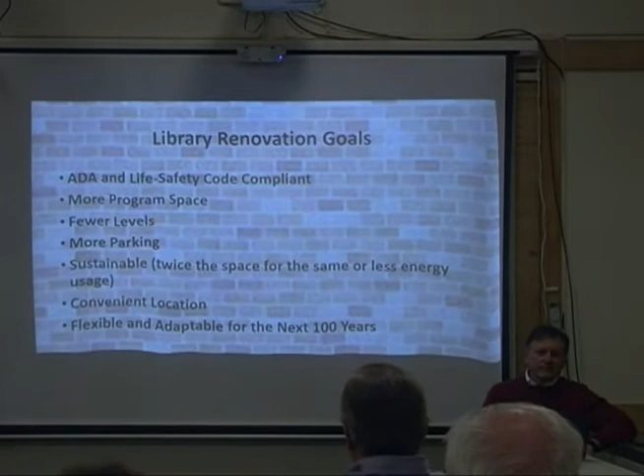So the library has been working on the library renovation project for several years, and when we first started we had a master plan committee, and the master plan committee worked on getting feedback from the community. We did surveys, which I'm sure a lot of you have filled out. We held 10 or 11 public meetings at this point to get feedback from the community. We consulted and questioned the library staff, each person individually, to get their feedback on what they felt the library needed.

We also went and visited a lot of libraries in the area, Alton, Plymouth, Bristol, Gilford, just to name a few, to find out what they have done, what they felt worked, and what they felt wasn't working for them. We then hired Tom Ladd from the New Hampshire State Library, who is now retired. He'd been there for 30-some-odd years, and he's a consultant, and he helped us design our building program and put all of our goals into writing.

ADA life safety compliant, of course, was one of our main issues. We're looking to add elevators, ramps. We want to lower our stacks so that people that come in wheelchairs can access all of the collection. And we're also looking to add a front and rear ADA entrance.

We also wanted to do as few levels as possible. Originally, we had talked about doing a one-story design, but in order to stay at our current location, we can't do it in one story, so we wanted to do as few levels as possible to make it easier to staff, friendlier to those with mobility issues, and parents with young children.

We also wanted to increase space, but also to add space that the community could enjoy. Our children's room, we wanted to move down to the first floor, make it a warm and inviting place. We visit a lot of children's rooms, and they're the heart of every library. They're very exciting, and we wanted to be able to see them, but not hear them, so we wanted a glass in, and you can see an example of that there.

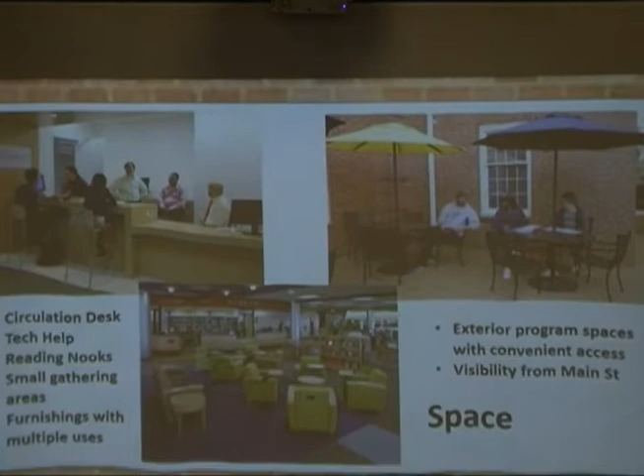And the staff and our patrons really wanted an exterior space. We live in the Lakes region. Part of the year it's quite beautiful. So we wanted a design that people could sit outside, read a book, check the internet. And we also wanted to have visibility with Main Street.

Our number one complaint from patrons is the lack of parking. So we wanted a way to get more parking, either through the municipal or library parking.

And sustainable—that was a comment from our patrons and also the trustees and staff, who wanted a more energy efficient building. So more windows, more natural light with passive solar, more high efficiency HVAC, and we have to redo all of our lighting fixtures, put LED fixtures in.

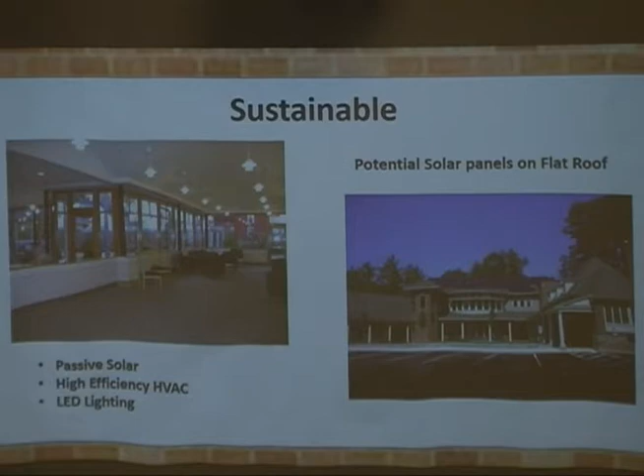Big feedback from our community was that they wanted us to stay on Main Street. We heard you. It's very important that we have a convenient location to help bring people into town, to support our merchants, but also people who grew up in Meredith have a fond memory of their library, and it was very important to them to keep that memory. So we're staying on Main Street.

Some of you may remember I started working in libraries over 25 years ago, and we had no idea computers were going to be as important as they are. Card catalog, magazine rack, all the paperwork involved in running a library took a lot of time, and libraries have evolved quite a bit since then. So when the library expanded in 1988, they couldn't imagine what was coming in 30 years.

Now we use computers, you can download books. Most of our catalog, actually a lot of our catalog, is online now—there's no more card catalog. So looking ahead 30 years from now, or 100 years from now, we needed to make sure we had a space flexible enough to adapt to the changing times. That was another consideration in our design.

And now I'll turn it over to Betty Stringer.

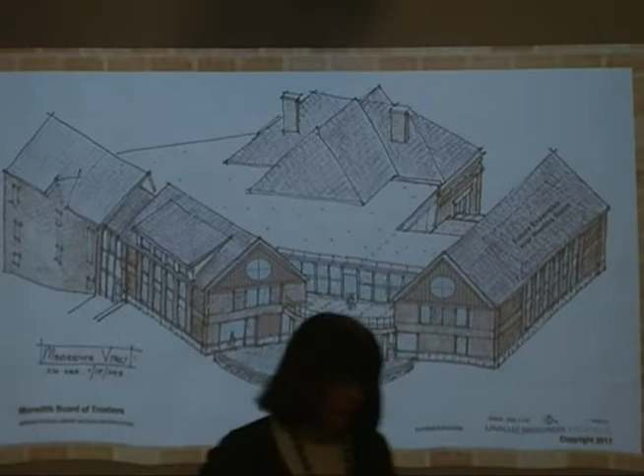Thank you, Erin. The trustees are really excited about this design that Ron's going to present tonight. I'd briefly like to explain the library trustees' process in making the choice of this particular design. You're looking at the back side of it now, and this should clear up some confusion that exists over our decision.

Last year at the town meeting, 88% of the voters agreed to expend funds for a committee to determine if it was feasible for the library to remain at its current location. Following many hours of work over the past six months, the committee negotiated a contingent agreement to acquire the Price property adjacent to the library, which could be used for additional library and municipal parking. Everyone—all the trustees, the public, everyone—agreed that was critical to making this plan successful.

They also interviewed three architectural firms, and based on some preliminary plans, they selected a firm to further develop its design. They met with the library staff, and produced a detailed design with a projected cost, and presented it to the committee. The advisory committee presented it on October 30th to the public, to the trustees, to the select board.

This committee, it was understood when established, would be advisory in nature, and the town manager confirmed that, stating the decision of what to do with the library would ultimately rest with the trustees, even though it's a town building. That was the intent in separating the library from under the town—it has its own control, a board of trustees.

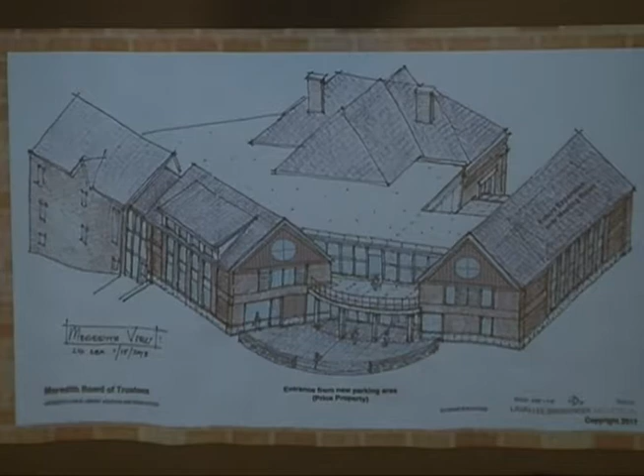So the trustees took the committee plan and subjected it to further review. This led to some concerns about the design, about some problems with where they would have to remove ledge, and phasing, and some uncertain costs that we were unsure about.

So knowing that the final design architect could differ from the committee architect, we met with three architects previously involved in the project and asked them, what can you do to give us more of what we want? And they all gave us great designs. It was Samyn-D'Elia, the committee architect; Chris Williams, who had done the '88 addition; and Lavallee Brensinger, who we'd worked with previously and had great trust in.

So all these great designs came to the trustees, and we dove into them. We wrote about their pros and cons.

I'm going to explain why we decided this design was best. The key decision points were the design and program space, the risk mitigation, maintaining operational abilities, flexibility and expandability, costs, and the architect expertise.

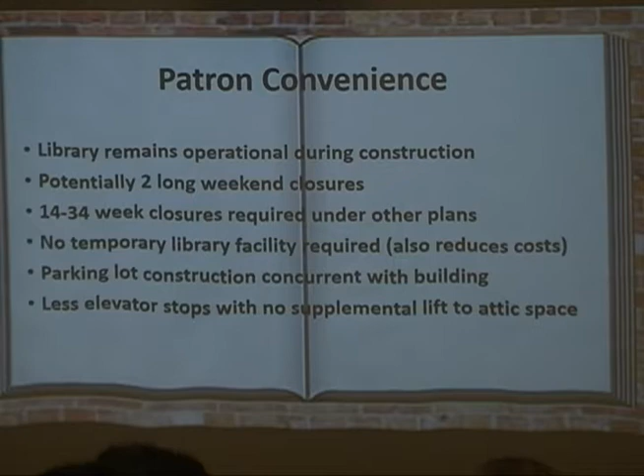Flexibility. The other advantage of this plan is we can expand at very minimal cost. That large program room we're putting in, we're using the first level of it. It's going to have a high enough ceiling that we could drop a second level in there in the future at minimal cost if we ever find that's necessary. It'll give us another 1,700 square feet.

The other design plans didn't have an expansion plan. They suggested we could maybe take over the handicap parking, or if the church left, we could go over there. Those are possibilities in the future, but this gives us expansion from day one, should we need it. We can move the interior walls if we find we need more space for the teens, or more space for this collection. We can move those walls.

We've looked at solar panels on the roof. For $180,000, we could get a system that would give us all the library's electricity. A lot of money unless we get grants or we enter into a power purchase agreement, different options to look at.

And then we're also retaining the historic character. And the best part, I'm putting my accountant hat on now, is that we have a guaranteed maximum cost: $4,358,500 in 2020. If we could build that building today, we could do it for $3.7 million.

If we did it next year, we could do it for $4 million. The other designs were all anywhere from $500,000 to $1.5 million more. And given we don't know what's going to happen with inflation, our number's good to 2020 building it. So delays are expensive.

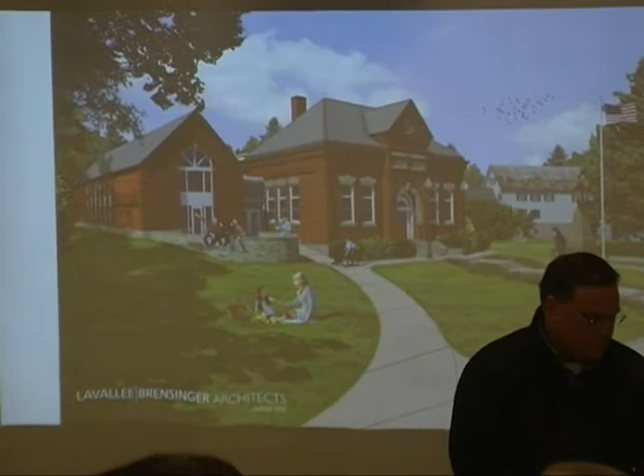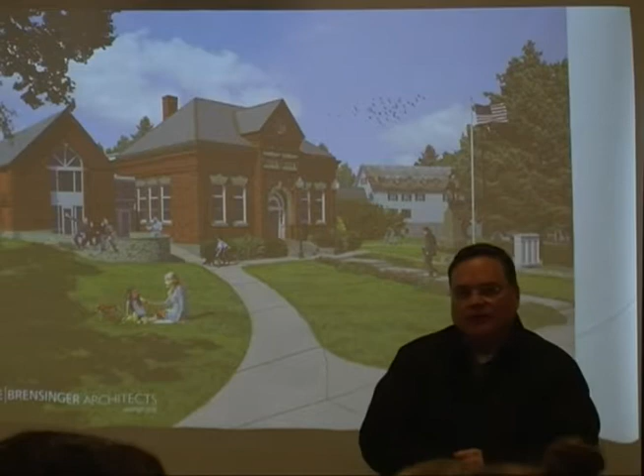Thanks, so hi, I'm Ron. I started working with the trustees in January of 2016, and we went through an entire process of figuring out not only what they needed in the library, but what they were looking to do. At that time, we investigated how we could possibly add on to the library. We had a diagram back then, I think in October of 2016, which is very similar to the diagrams you'll see tonight.

One thing we wanted to do when approaching the renovation project was to let the existing library stand on its own—we didn't want to take over the front of the library. So what you see here is the meeting room; it's a very simple structure. Lots of people talk about how to do this in a simple way, and one thing I've learned in 27 years working with builders and contractors is you've got to keep it simple. That's what allows you to build it affordably, and that's what allows you to build it right.

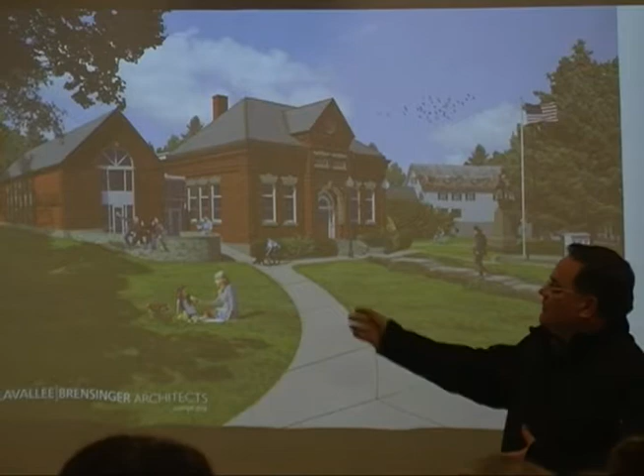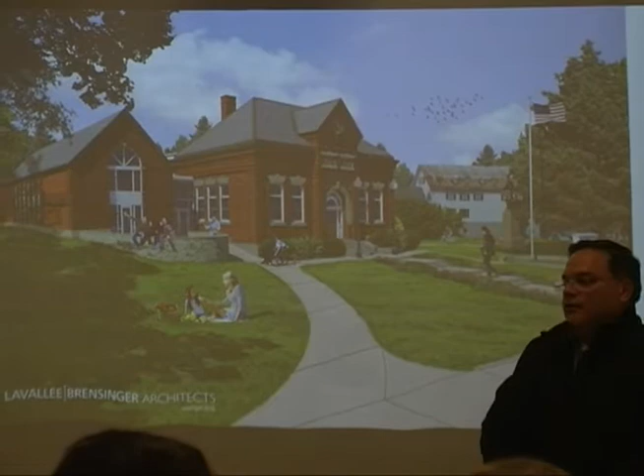So what you see there is a very simple structure connected to the existing library with a glass wall, and that becomes the lobby. The other nice thing about historic buildings is they normally have a front door. There's normally granite. It's a very beautiful experience.

We try to leave it alone, because once you start messing with that and try to make it handicap compliant and everything else, it loses the character from the history. So what we do is we put a second front door in. As people come down Main Street or up Main Street, they're going to have a handicap accessible pathway that leads you to a new handicap accessible door. And for those who want to experience the history of the library, they can still use this door. This door does not need to comply as an exit, does not need to comply as a handicap entrance, and we leave it alone. There is money in the budget, though, to fix the stairs.

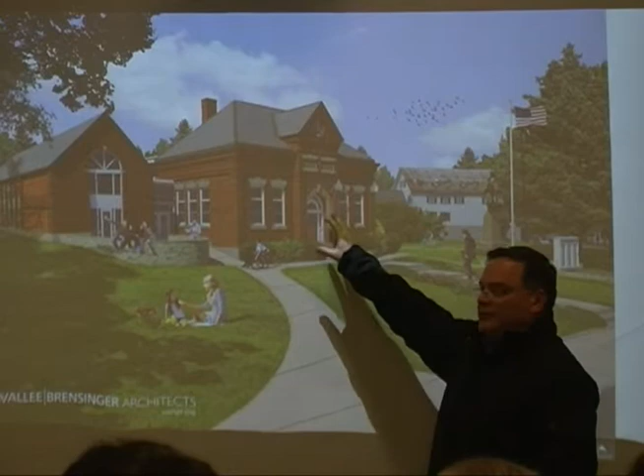So what this does is it sets up sort of a look, if you will, of the library. And you'll notice when I start flipping around, I have a 3D model we can spin around, that the look is we're taking cues from the existing library, the historic library, as well as the 1988 addition. So this looks like a complete composition, but we're not copying the old library. Having worked on some libraries with Peter Michaud and the Historic Commission in New Hampshire, that's one thing they want you to do, is make sure people realize that this is a 2018 building and this is an older historic building. We don't want to compete.

So in the back of the building, this is the back of that same meeting room, a very simple structure. And then this addition is the same simple structure, it's the same width. So what we're doing is creating these two very simple bars that are connected with a piece in the middle. This connection piece between the two simple buildings becomes your main entrance from the parking lot.

So when you park on the Price property and you come down again, it's all handicap accessible and comes right in to this entrance. This entrance happens to be in direct line with the entrance from the street, so instead of driving through the site, you can walk through the library. So how that works is this is the new entranceway from the front. Main Street is here. So as you come in and you walk right straight back out, you're in the backyard.

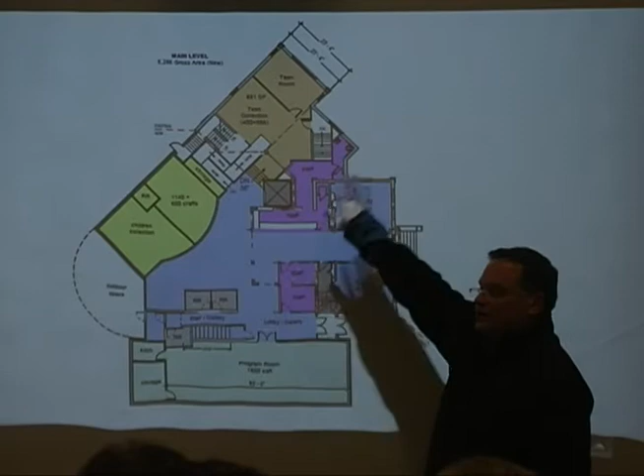This lobby gallery, so we can hang up some paintings and such, the library was talking about having a gallery space. So this space in here provides you with restrooms, the kitchen, the storage, and the meeting room. There would be a divider wall, sort of comes down out of the ceiling, and you could lock that up so that when the library closes, you turn off all the library systems, and this is our building within a building.

When we first started talking, they visited some of the libraries we did. One of the nice things about those libraries is if you had a Boy Scout meeting going on, if you had something going on a Sunday, they could use the library space and you didn't have to turn anything on. You didn't have to have the staff come down. You had this room to use.

On the flip side, right now this is where all your computers are, and you have a sitting room here. So using this, and with the fireplaces and such, using this probably the way it was used years and years ago, is when you come in the front door, there's reading rooms on both sides. As you come in the front door, there's the staff desk. So you've got staff members here who have their eyes on both doors.

You have a staff member here through this glass wall that you saw in the elevation towards the back, so this staff can see the parking lot, they can see the front door, and as people come in here, they can see you, and these staff members can see you. What we've done is distributed the staff. So you've got staff over here near the teen area. This is the children's area in yellow. This is the meeting room, and everything else in blue is adult on the first floor.

So when we go up to the second floor, I just want to reiterate that this is just a very simple structure, and this piece right here is a very simple structure. We're going to modify this stair, for anybody who's been in that stair, okay.

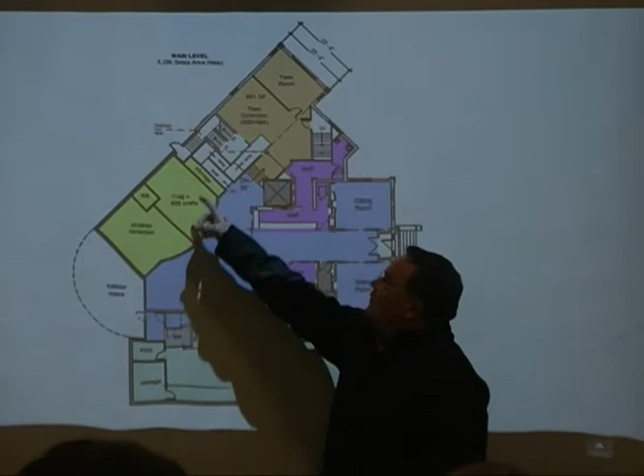So you'll see in the plan that it's no longer going to wind. When you come down and get to the part where you need to wind, we're going to put a landing in, built right over those stairs. We're not knocking anything down, we're not messing with anything, we're just building a landing over those stairs. From the halfway landing, as you come up the stairs from the meeting room, we're going to extend another piece of stair and then an exit door directly to the outside. So in essence, we're taking your fire stair and repurposing it and making it handicap compliant.

Then we have a stair over here, which is the new stair, which is handicap compliant. So those are your two means of egress off of the upper floor. The elevator that we talked about is here.

The reason for that is you see this red line that runs along here? That's your existing building. What we want to do is keep all of the structural points, all the load-bearing points that exist in that building now. What that means is when we have this glass connection, you'll be able to walk into the library and see the back of the old library, because you'll have that brick coming down. And then we have windows, we're going to pull the window out and pull the sill out.

What we're not going to do is blow off the end of that building and then try to figure out how to hold it up. Again, it's time and it's money, and that's what we try to do, is sort of keeping these things simple.

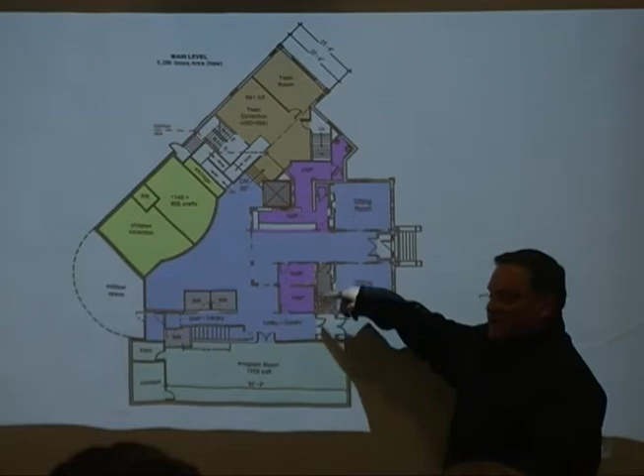Where you have the areas where you have now where the stair is, rather than try to take that stair out and monkey around with that, it's just going to be a stair that the staff can use. It's not handicap compliant, it's not open to the public. If they never use it, they could put potted plants on there, they could use it for storage. But we're not going to deal with that.

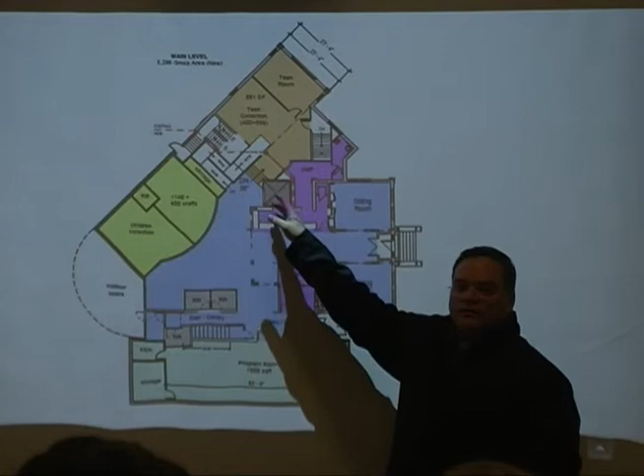And then in 1988, they have boring information from their geotechnical work when they built this addition. We know that the area back here is cleaned out with no ledge, because that's where the footings were. That's where they dug the hole, basically, for 1988. So that's why we picked that location, which was also a strategic location, because it gets us to where we want to go.

And it puts, like they said, this is only 35 inches, so you're only going down a few steps. So that's where we put the ramp. You get the ramp, the elevator, and the stairs right there.

On the second floor, when you come upstairs, it's all adults. The staff area is, you know the hole, when you walk in the main library right now, you look up, you see the rail? We're gonna put just a glass wall around that railing, not taking the railing down, just putting it right behind the railing.

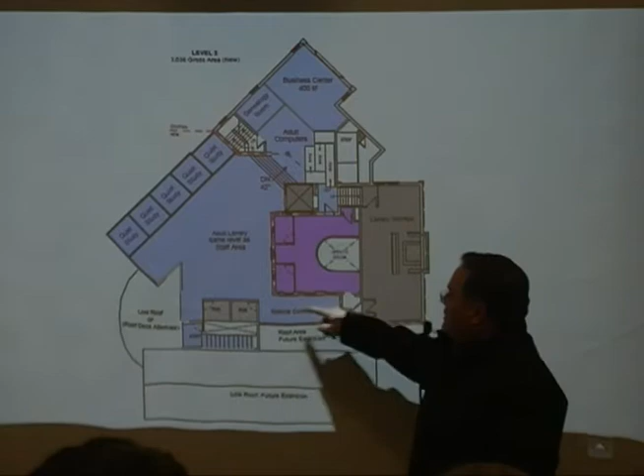Now the staff can actually see down to the front door, so you have more eyes on the front door. And then we got 2 offices here. This is the adult library. We've got quiet study rooms alongside the church, genealogy room, a business center. So essentially your teen room and your business center look out those windows of the 1988 addition. So when the kids come in, they can kind of wave to one another and then go find their way to get there.

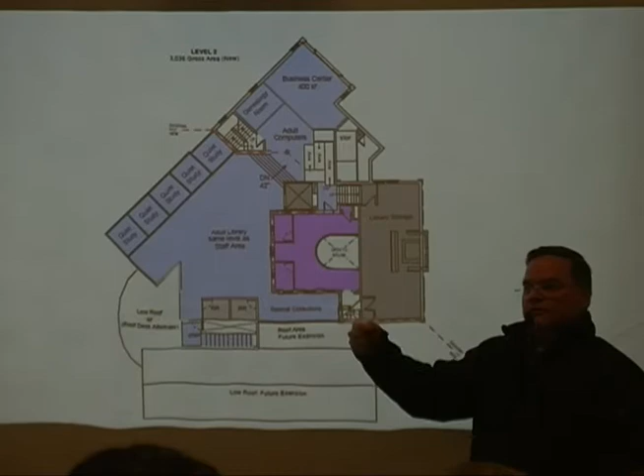Restrooms on the upstairs. This is where we've built this structure, the same height, everything is that structure. So there's economy of scale, right? You've got the same building getting built twice, one here and one here. But this allows us to come in later and build a platform. So we wouldn't take the roof down, we would put in new columns with the floor in this location, and this could become more library space. So that's sort of how that works. And there would be a new roof over this. So that's basically the second floor.

To get up to the storage room, we still have access from the dangerous stair in the back for the staff, but we also have these steps from here. And we're just using that entire attic as storage. So the public won't be able to go there, so it doesn't need to be handicap accessible.

One of the biggest complaints people always mention to me is after a project is done, we go back and do a post-occupancy review, which is basically lessons learned. I do this for all of our projects so we learn from what we've done. Storage, storage, and storage. The nice thing about your project is you're going to have a nice big storage room up there.

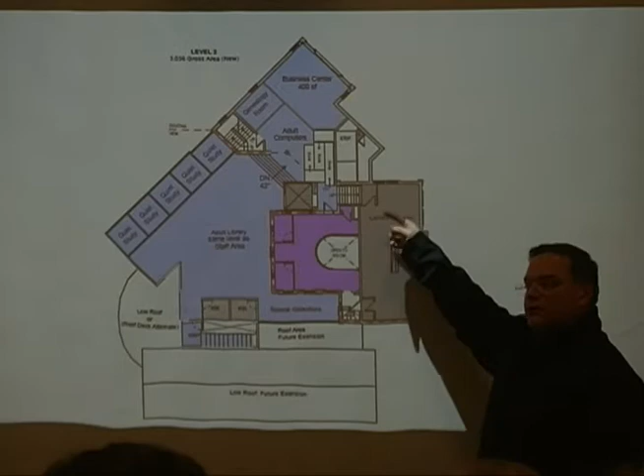The third level is actually down in the basement. So you've got two levels of library space, and then the level down here, which is the old program room you have now, basically becomes a Friends of the Library space.

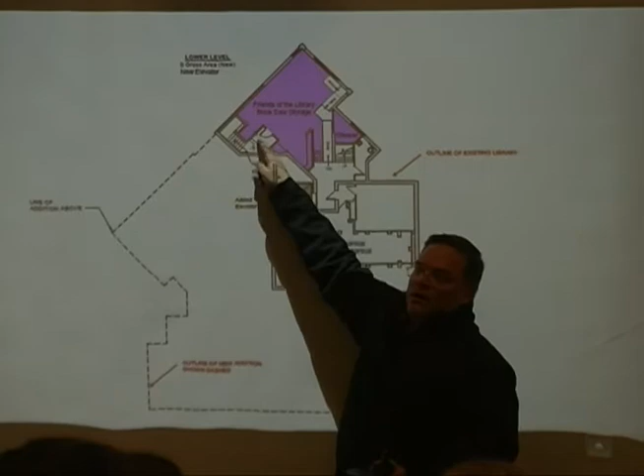So this is how we fix it. When we say modify the stair, we cover the winder, add two steps, and kick that wall out. So now you've got your stair, and it no longer winds—it comes down 90 degrees, which is what's required by code.

The elevator would come here, and then we have a ramp down to there. We keep the bathrooms on all the levels. We're putting in new handicap bathrooms, but why take out the old ones? You just have more restrooms for the staff to use.

All the existing mechanical systems—we're going to put all the new mechanicals in with the old, as these things are replaced.

And the site—you can see here that in 1988 they had a 10-foot setback on their drawing, so we came right up to that 10-foot setback line, if you will.

We're building on top of the ledge. Remember, our floor is the same floor elevation as the existing library. So when you go up those stairs in the back of the building, on that porch, we're able to build our slab above and pin it to the ledge. So we don't have to dig down and build foundations.

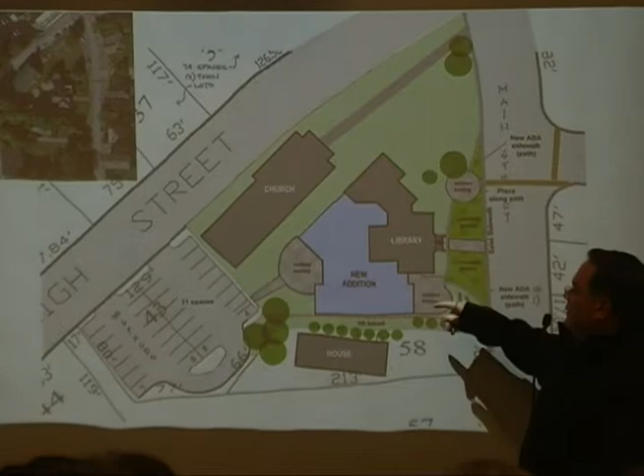So now we've got our new addition. This is the area back here—these are the parking spaces, and the neighbor's house.

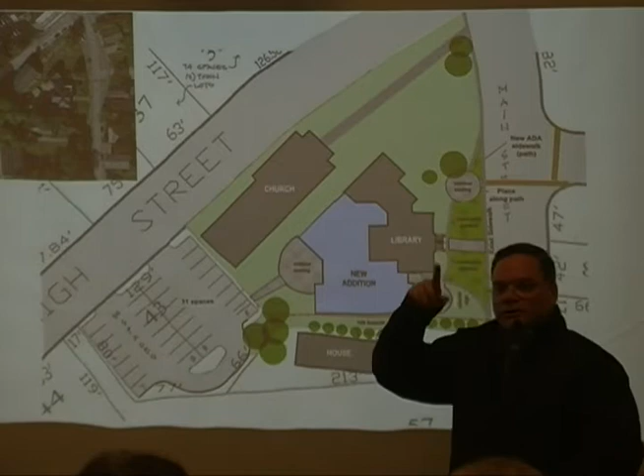One thing we wanted to do was relocate the existing war memorial that lists the names and such. We're thinking of moving it around the tree down here, around the statue and everything else, from here down to there.

And now you've got a sense of place, so people could sit down there, hang out down there, all around that war memorial area, if you will.

For questions, one of the things we have is a 3D model of the library that we can spin around. What you don't see here is the trees, but what you do see in the renderings is kind of a view looking down at the library, as if you're 12 or 15 feet tall.

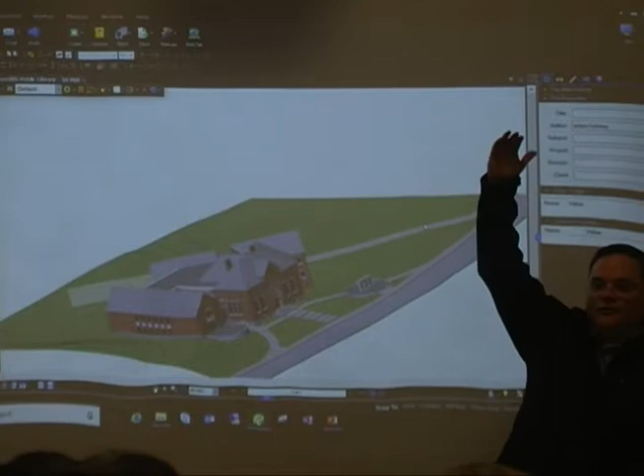But when you model this in real life, that lawn is still there—see the hill? So we're not changing any of that out front. That's why our walkway starts from here and goes all the way down, ending up over here, because that's what you need to do to get the ramp or walkway sloped for handicap compliance. So that hill still remains.

But for the most part, I'll just open it up to questions.

You don't have to walk up. They asked you to say who you are.

Yeah, I'm Liz Lapham. I want to thank you for publishing this on your website so I was able to look at it this morning. I have two related questions on safety and accessibility. If someone had a medical issue in the library and an ambulance had to be called, how does that ambulance get to the back door—does it drive over the pathway? And also the fire department, if there's a fire, how do they get close enough to the building? If it's in the front, I can understand, but if it's in the rear. So that was one question I had.

Can we address that one? Sure. Ann Butler met with the fire chief—Ann, would you like to address what he told you? Just a moment, then we'll get your other question.

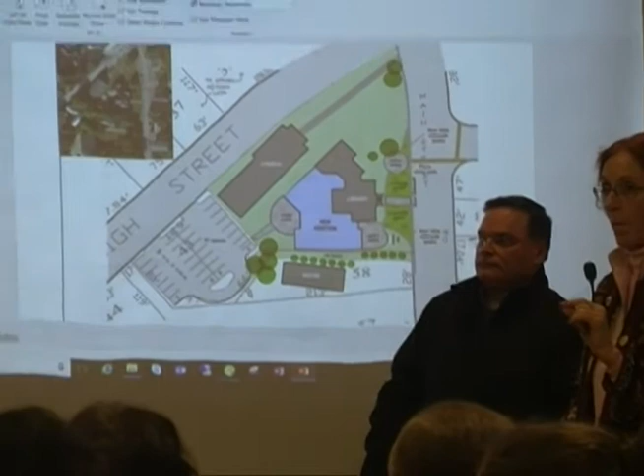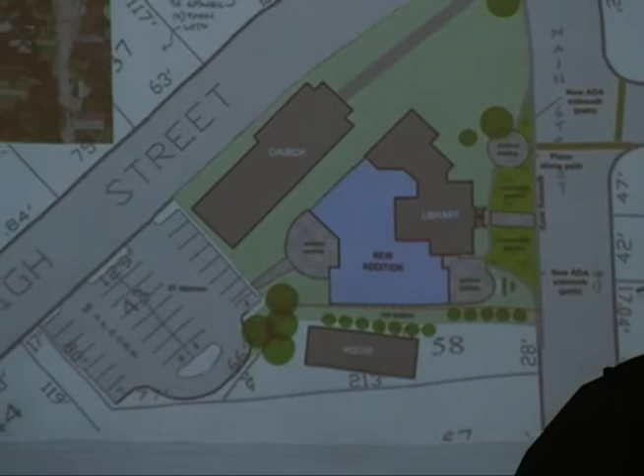The second question I had was more on accessibility. The plan we saw a week or two ago with the drop-off seemed to make sense to me. So now, if anyone drives into the parking lot, a handicapped person—whether in a wheelchair, someone who doesn't walk well, or someone with a 6-week cast on their foot—do they have to park in the parking lot and then walk?

Sure, like at Hannaford, there's no drive-up parking or drop-off for handicap access. Well, that's not true at Hannaford—you can drive up to the door and let people off. So in this plan, can you drive to this area and just drop them off?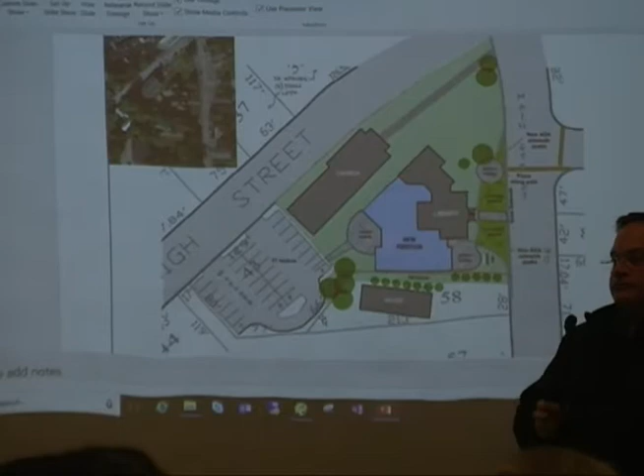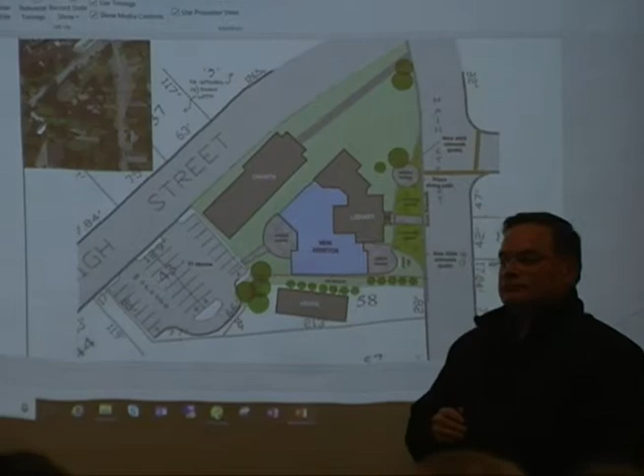You know better than I do. Well, I guess that's the point I was trying to make—you're dropping them off in a parking lot, not at an entrance. That's correct, and that's why I tried to address that being able to drop them off right at the door would be convenient, but you're giving up a lot of real estate for people who wouldn't use that feature that often. Most people, even elderly people who come to the library, drive themselves, park, and come in.

I also want to point out that when you come into the parking lot and stop, the passenger side door is here, and that walkway—the striped yellow walkway, if you will—is between handicap parking. So you drop them off right here, and they come right in here, and this is all handicap accessible.

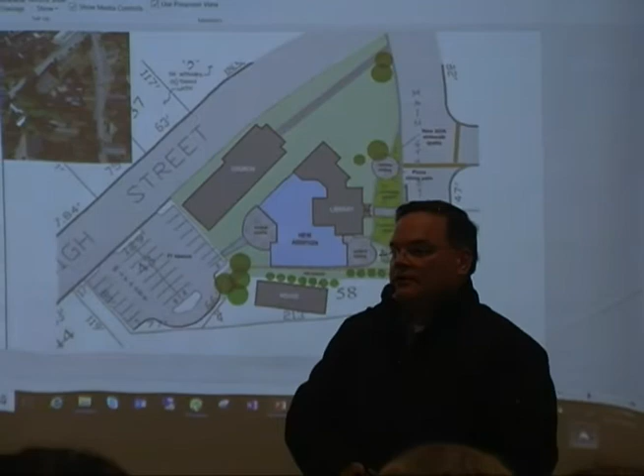That was a good question, because one thing we have to consider in everything we do is safety and security, as you all heard. I do a lot of schools and a lot of libraries, and Winchester was the first time I've heard about issues we should start considering in our library designs.

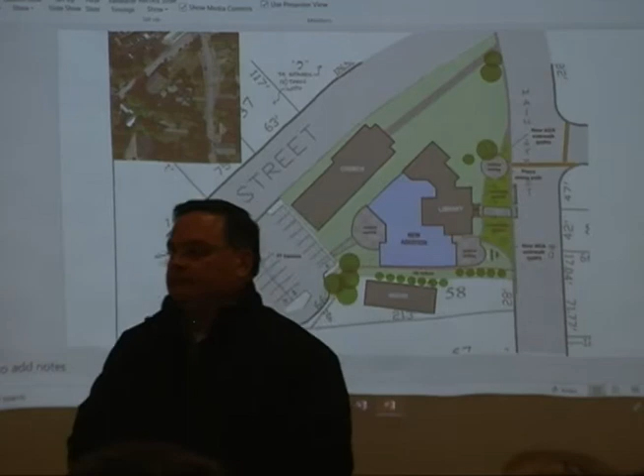You're stuck, I can't go any further—this is as far as my head goes. You're welcome to come to the podium.

Carol Gergen: I have a number of questions. In looking at the concept drawing of the front of the library, particularly the area in front of the new meeting room space—to my eye, it looks like... no, in the front, by the patio.

It looks like the hill that exists now is no longer there. Is that true? That's not true. So the concept drawing is a bit misleading? No, it's because to me, we are standing much higher looking down on this.

So when we look at the model again, you can see that hill is still there. That's the grading, see the hill? It's still there, still coming down. This model is that rendering.

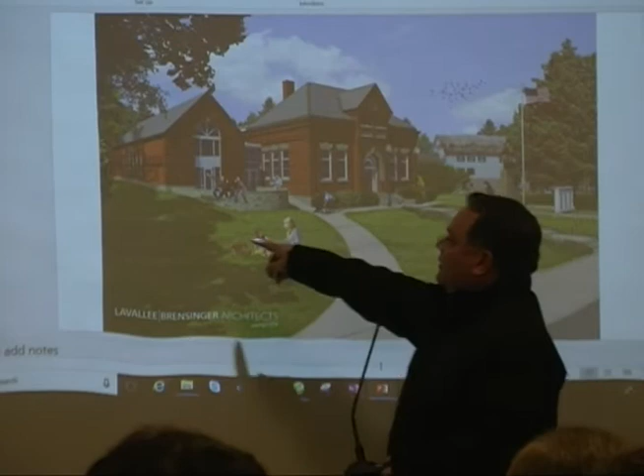So how we do this is we actually build the building for real in the computer, and that's what you're looking at right here. It's a program called Revit. Then we take that and put the real looking materials and the trees and so forth, and we drop it into a photo. Because of the perspective looking down, that wall is like twice as high as that wall, but because you're looking down at it, it looks flat. It's going to be the same hill, just like you saw in the model.

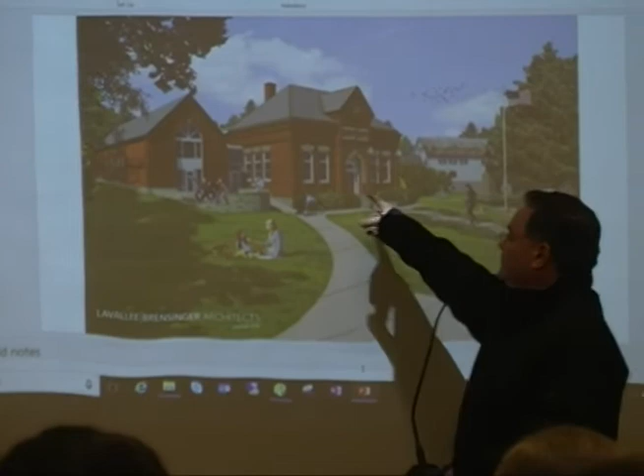The main entrance to the historic entry is here. Looking at that sidewalk, bricked area, or flagstone, is that elevation the same as it is now? It is, so all your garden spaces over here remain the same. The path goes behind that and down towards the statue.

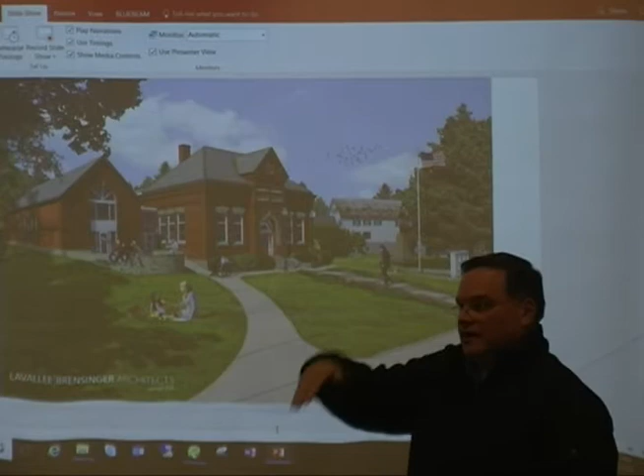That's how you get the grading you need for the handicap ramp. If we came down here, or here, or here, it's not compliant. But if we come from that space right there, all the way over to where the statue is and past the statue to the sidewalk, it is.

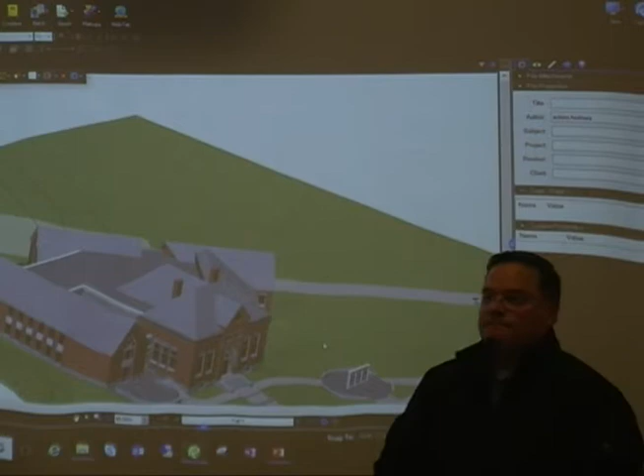Okay, my next question is about roofing materials. If you would pull up the previous rear elevation that shows the new meeting room and the roof, looking down on the roof. You had another slide previous to this. This one here? Yes. So the flat roof area, what material is going to be used for that, and is it absolutely flat?

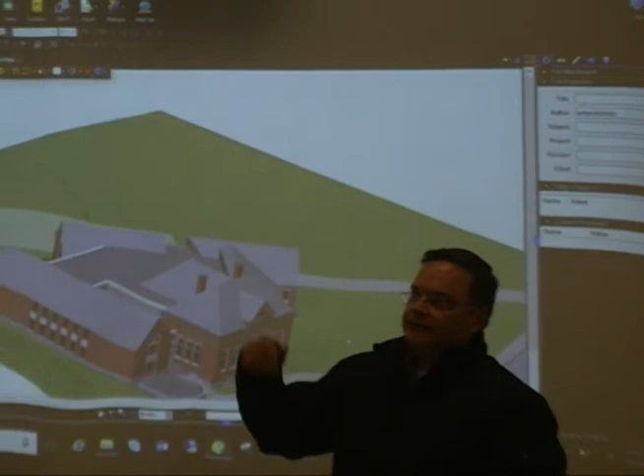It's not absolutely flat, that's a good question. We have internal drains in that area, and the roof slopes at 1/4 inch per foot, which is the requirement for what they call low slope roofs. That material is EPDM, which is basically rubber roofing, let's just put it simply like that, and it's all glued. The roofing you build today is a lot different than the low slope roofs of the past, simply because of snow loads, water loads, and drift loads. That was never taken into account as stringently as it is now in the code. So these flat roofs and pitched roofs are all engineered to deal with the fact that we have snow and rain in the area, and everything drips off this roof internally.

Okay, my next question about the roofing is the original roof on the historic building. Slate. Is that good? Is it in good condition? Will that same roofing material be used on the meeting room?

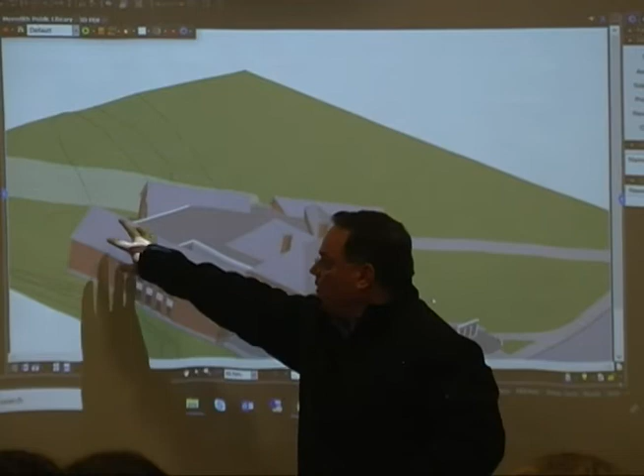So the existing roof, there's a report done for the library that talked about the condition of the slate roof. We're not doing anything to the slate roof. We're re-roofing the 1988 piece of it, and putting that same roof we use on 1988, the shingles we're re-roofing, on the rest of the building. Those are reinforced fiberglass 50-year shingles, like a landmark shingle. Those needed to be replaced in 2019 anyway, that was end of life for the old asphalt shingles. So we'll match those when we replace them on the new area. Right now we have asphalt and slate, and people don't really notice.

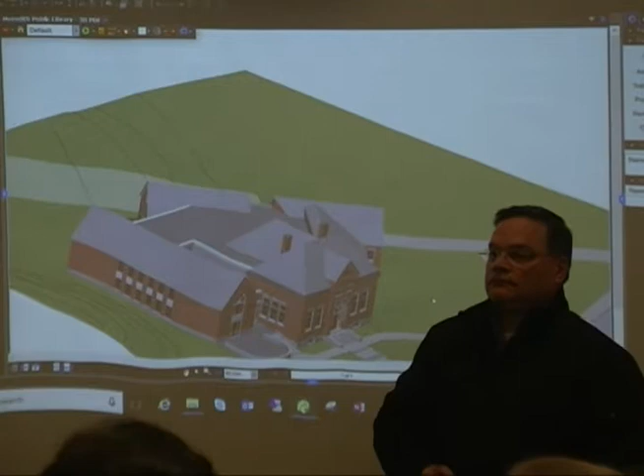So, in looking at the earlier concept drawings, I was concerned that the overall appearance of the building with the historic building, the 1988 addition, and the new meeting room space would be compatible and have the same kind of design appeal.

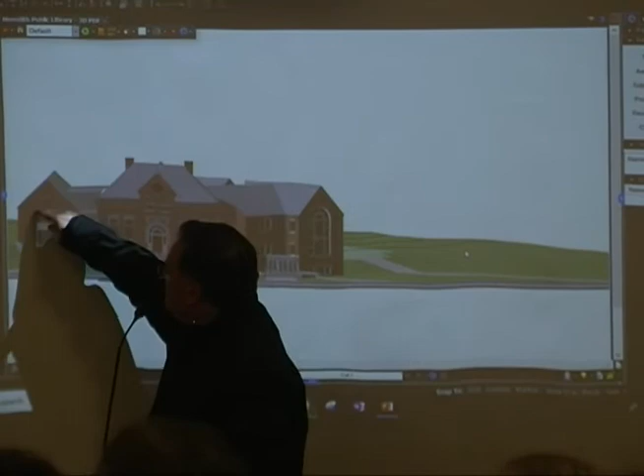So basically, you see the nice arch over the doorway? I suspect that in 1988 they wanted to use that language. Rather than come over here and try to do something else, just because that's what architects like to do - I can make fun of architects, I'm an architect, we make fun of each other all the time - taking that same language and moving it over here really allows this to look like one composition, one building.

Okay, I have two more questions, as long as they're here. That's okay. So I'm interested in the HVAC system. I'm not sure what's current, I'm not sure whether it's going to be all redone, can you speak to that?

Sure, it's all gonna be redone, and we got air source heat pumps. Why are you shaking your head now?

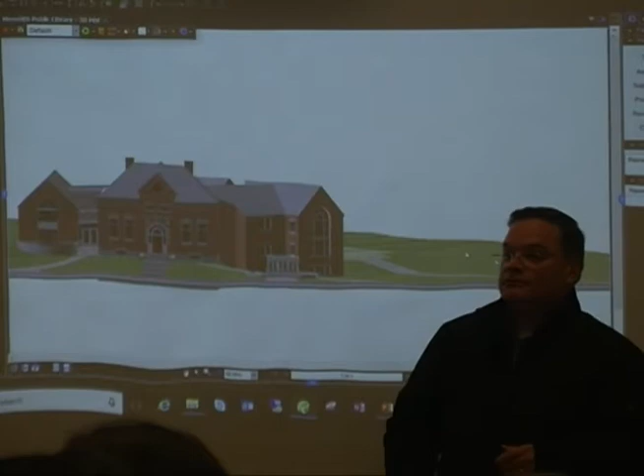I thought we were keeping the boiler in the historic building till end of life, and doing all the heat pumps in the new addition and the old addition, and getting our AC in the historic building from there. Is that incorrect?

That's incorrect. We're keeping the boiler while the construction takes place, since we obviously have a turnover to take place. So we keep the existing boiler, which is a hydronic system, and you see all the fin tube radiation around. We can't just disconnect the boiler and put a new one in. We're using air source heat pumps that are going to heat and cool the library when it's done.

Okay, two more questions and then I'm done for now. Regarding replacing the current lighting in the existing facility, will all the lighting in the new piece as well as the current structures be up to current energy efficient standards?

Yes, we're gonna do all LED lighting. And what is your recommendation as an architect on this project about the solar panels?

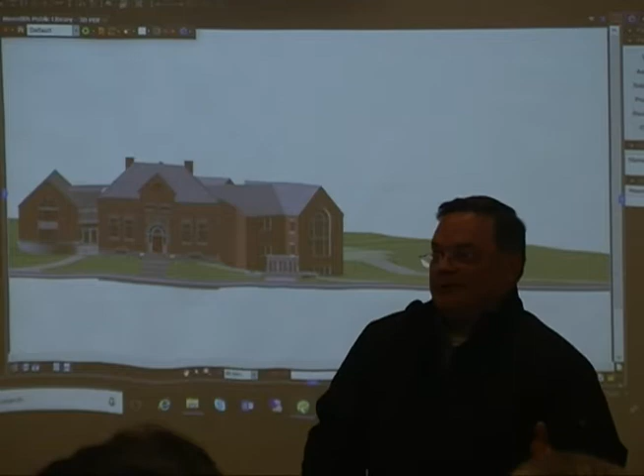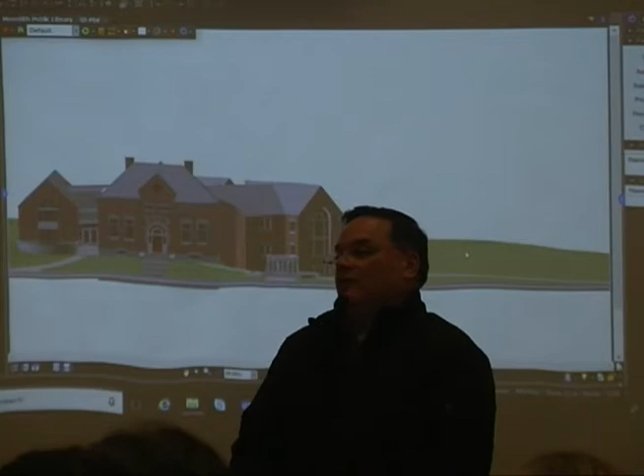So I'm a member of the U.S. Green Building Council, I'm LEED accredited, and I'm all for renewable energies. I think solar panels are still a little bit expensive, but the return you get—we did an analysis, we got all the bills and so forth from Aaron—you're looking at about $200,000 to put enough solar panels on here to make a dent in your energy efficiency for the building.

The other thing to consider is that all of this building we're wrapping around your existing structure—those exterior walls, which are not very well insulated—now become interior walls. So the building itself is gonna become more energy efficient than it is now. And if you're able to afford it, or through a power purchase agreement, which I sent an example of to Aaron from other projects we've done, to put solar panels on here, I think it would be great.

The one thing I'm very interested in is what Tesla just came out with, which are the solar shingles. They're not proven yet, which is a problem I have. I always like to do things we can go visit, so when we all start working together again, I'd like to go visit some of these buildings and say, look, this is what an air source heat pump looks like, this is what the LED is, these are the pros and cons of these things.

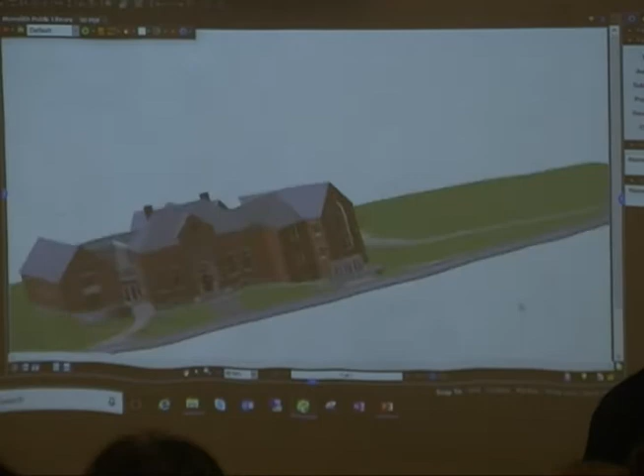One of the nice things about your building is if we turn it this way—whoops, this is south, right?—you do have these big trees here, so that's something to consider. But if we were able to put solar panels on all of this, and these pieces up here, the question is—I wouldn't touch the slate roof.

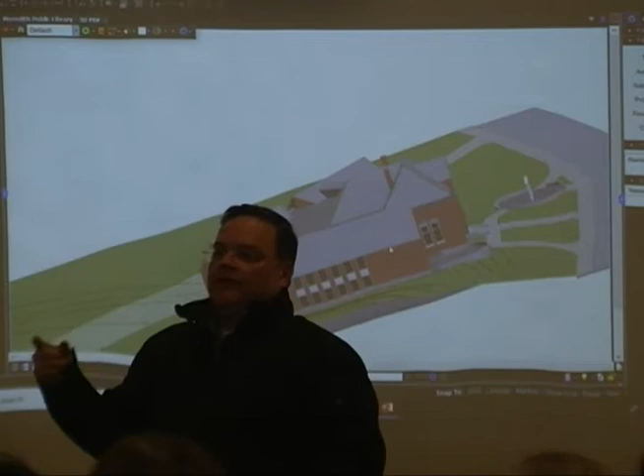The one downfall about putting solar panels on the roof that I've learned over the years, since I've had the luxury of doing this more than 20 years ago, is when they had to go up and do roof work, you gotta take the solar panels off to actually work on the roof. So lots of people now are putting them over the parking lots or down on the ground, and you see that a lot sometimes.

But I do think solar energy is the way to go. Knowing what I know about the Price property, and about the ledge you have here, I think we should do some fundraising, find out if there are people interested in sustainability, and do a geothermal system—drill those borings, or boreholes I should say, right where the Price property used to be, for a closed loop geothermal system.

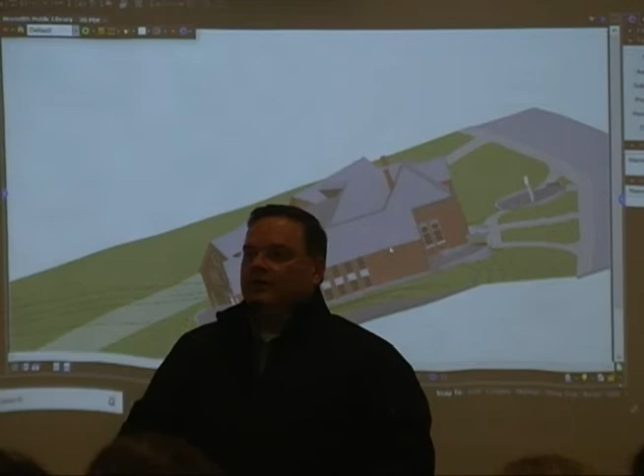Thank you. Geothermal systems, by the way, are the biggest return on your investment—in other words, it pays you back quicker than solar energy.

And I don't know if we mentioned that the whole building will now have sprinkler systems in it, so that'll be a big plus, and it'll also all have the cameras and up-to-date air conditioning.

Hi, Mark Billings, Meredith. If you go air source heat pump, you must have a backup heating system. Why?

We'll learn that lesson: if temperatures drop below 15 or 20 degrees, air source heat pumps don't provide enough heat. So the newer generation air source heat pumps, we can review it, we can take a look at it, we can talk about it. We could do fan coils.

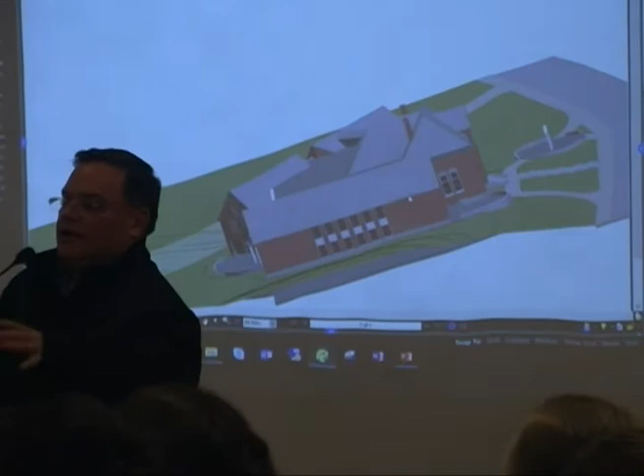But we believe air source heat pumps are the way to go. We're actually doing them right now on a project in Bath, Maine. The older technology had no backup. As crazy as it sounds, when it's 0 degrees outside, there's still heat in the air. That's nuts, but there's heat in the air because -10 is colder than 0. When engineers talk like this, architects raise an eyebrow and say, yeah, right, I don't want to get that phone call. The newer air source heat pumps out there today can deal with lower temperatures.

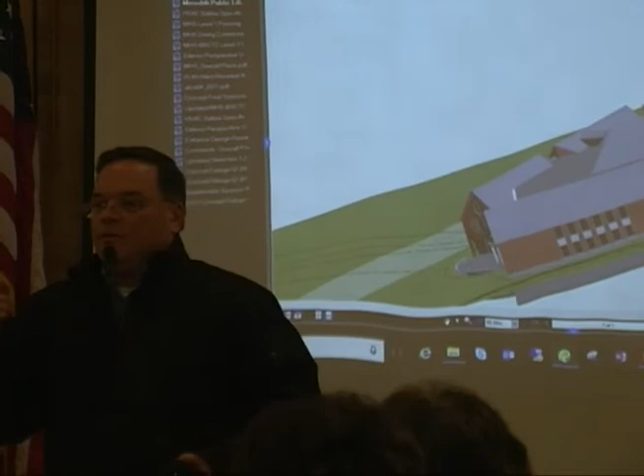The other thing that's changed dramatically since that first round of air source heat pumps is the way we insulate walls, windows, doors, and roofs. So now it takes a lot longer. If it's 72 degrees in here with an old wall, it would take 24 hours and this space would drop to something uncomfortable, like 55 degrees, heading towards 50, then 45, because it's equalizing the temperature with outside.

That's because of R value - everybody always hears that term. Well, R is the resistance - how long does it take for it to be as cold in here as outside? Anybody with camps or lake houses can actually get colder inside than outside because of the R value. It equalizes, then it warms up outside, but it's still cold in here because the heat's going the other direction. So the newer air source heat pumps can work at much lower temperatures.

We can take a look at that, but I think people in the community who have expertise on this - if you have HVAC contractors in town - we should bring them to the table with our renewable energies discussion and ask how we get the biggest bang for our buck. But right now, on price, it's the air source heat pumps.

Yep. Can you bring that picture up? Please, I'm happy to go to the podium. Lynn, Montana, Meredith Neck Road.

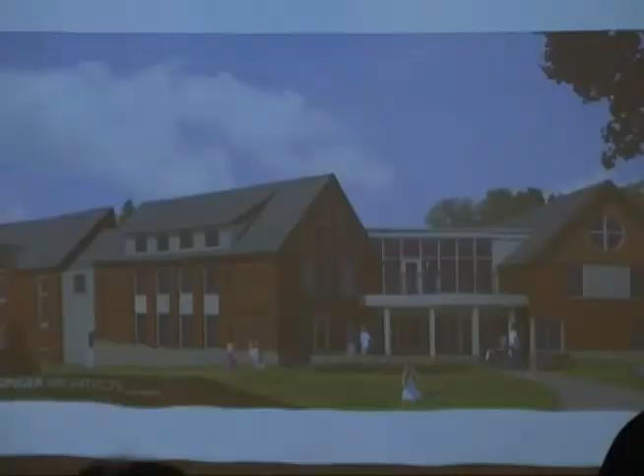When I look at that picture right behind you, I see an upstairs balcony railing and stuff like that, but when I look on here, I can't figure out where it is on this drawing. I don't see it anywhere - what am I missing? That rounded thing there - right, that's it. What's it that says... is that it? I guess that's that, okay.

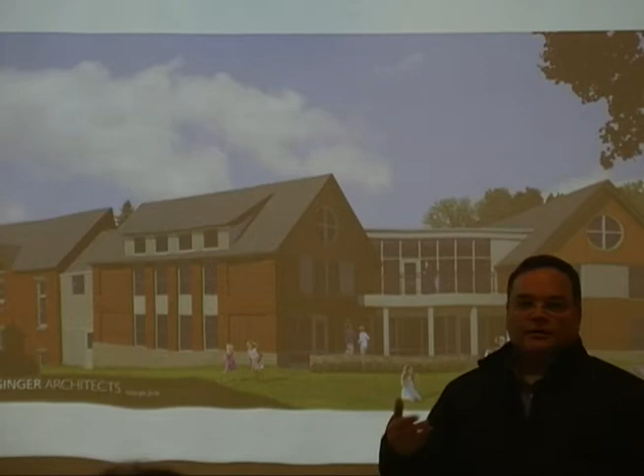Yep, and when you look at this picture again - sorry, that's okay - where is the quiet study rooms going? So those 4 windows are in quiet study, 4 of the studies, and there's 2 in the corners that have no windows, is that it? And they all have glass walls to the inside. So if I bring my laptop up there and want a room without glare, I can sit in a room without a window. As we move forward, if it's decided, we can take a look at putting a little window here and here.

So what's the dormer for? For head height - we just want to give it a little bit of character on the outside of the building, and we want to bring it up to get more natural light, so a little bit of a higher ceiling in that area for those small rooms, because the higher you get the windows in the building, the more daylight, the further it comes into the building.

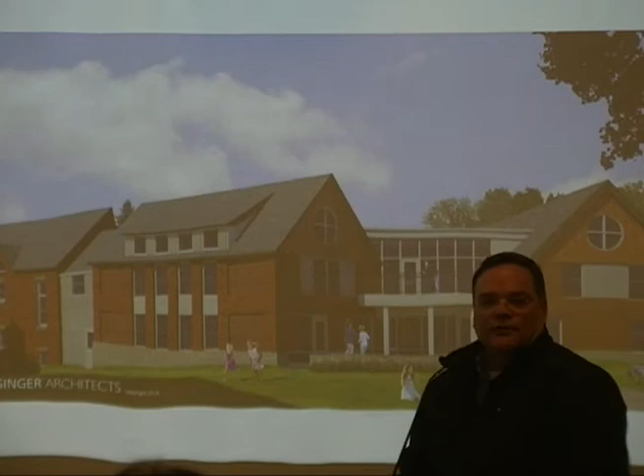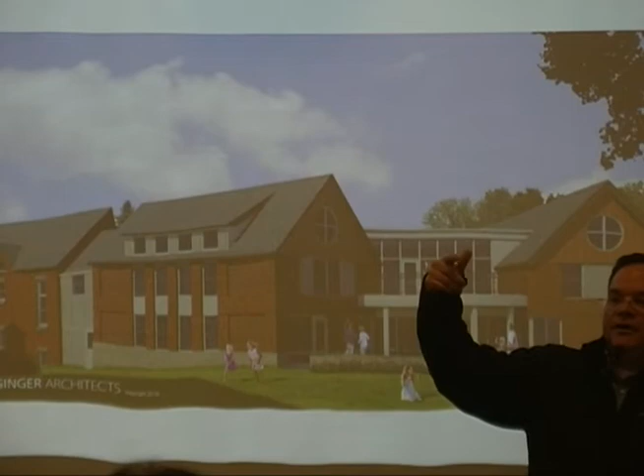You don't need head height in the genealogy room or the business center? Yep, those are on the existing piece right here - that's the height of your existing windows now. Ours is a little taller, but the genealogy room is here, and the business center is over there - that's the old part, the existing part of the library now. So if you were up on that upper level where the book stacks are, that's where those rooms will be.

Well, I have to tell you, I think this is a brilliant plan. I love it. I love what you've done with the old building, front and center and standing out. I like the balance, the symmetry of matching the old addition. I wouldn't like the idea of tearing down the old addition - the town spent millions of dollars to put that addition there.

When it comes, it's very functional, serves a purpose, there's no reason to tear it down, so that's very good. I like the price compared to the other plans. I just want to commend the board. I think you've done an excellent job.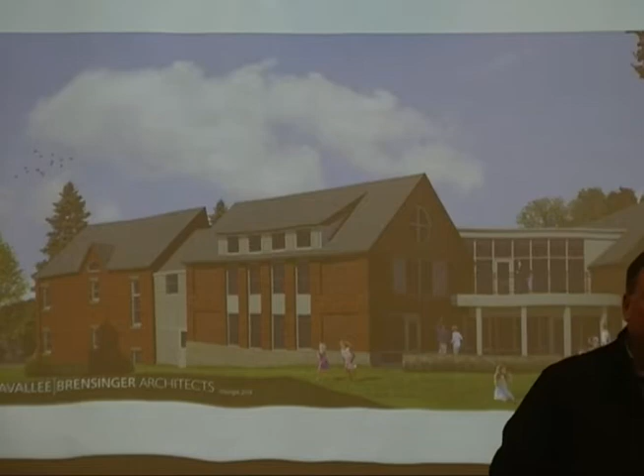We'll appreciate any support and feedback you can give, and pledges. So, yeah, well,

Jack Carty, Meredith. There's a lot of different roof angles in these buildings, and we're talking about solar, ballpark, real rough ballpark. What percentage of roofs would be usable for solar, presumably facing south?

We haven't figured that out yet, simply because of the tree line. The first thing we would need to do is take a look at how that sun angle comes down, where the tree line is, how much sun you can get in the morning with the eastern sun, and how much you can get with the western sun. So that analysis hasn't been done yet.

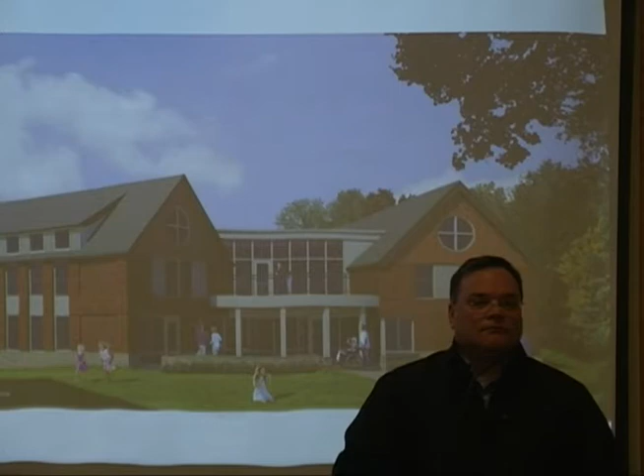Okay, and this second question, there's something, there's a guaranteed price, guarantees mentioned in the presentation. The last time we met in this room, a local contractor said it's been his experience the guaranteed price doesn't always turn out to be what the contractor is willing to bill it for. Who guarantees the price?

So it's a great question. So how this works is we had Milestone Engineering and Construction price the addition. When they price the addition, we're at a concept phase right now, so they're going to protect their budget. And so they give a budget and then they add 10%. That's a contingency. That's their contingency.

I wouldn't tell an owner that's the owner's contingency, that's if we hit something unexpected. That's not it. They're taking 10% of their cost, $300 and some odd thousand, in their price, because they just don't know. So we've looked at this thing, and they've come here, they've visited the library, they've looked at what we're doing, they've priced everything up, they know the systems, the materials, and so forth.

Then they add 10%. Then what I do is I add another 10%. And the reason, this is the best way to put it: this is a public project. When you vote on this, whether it's guaranteed, not guaranteed, maybe, maybe not, there's no more money in the bucket. Once this thing is approved, we have a certain bucket of money. So what we need to do is protect that budget.

So what we've done is the contractor, the construction manager who priced this, added 10% contingency. We then added 10% contingency to cover escalation between now and 2020. He priced this as if we were starting construction in 2018. So if we start in 18 months or 12 months or something like that, we've got that extra 10%, another $300 and some odd thousand. So that's 20% just on construction, just to protect the construction budget.

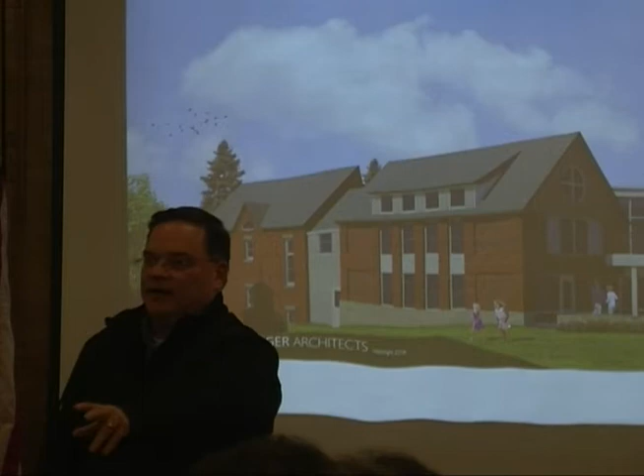This guy right here has like 100 people in his company. This other guy's got 10. Why don't we take the guy with the 100 people in his company? There's a reason: the builders have relationships with the subcontractors that no architect has, no owner has. So you benefit from that.

So do we have contingencies in this number? Absolutely. And for that reason, I'm able to say to everybody that Frank LeMay, the owner of Milestone Engineering and Construction, priced this up. We've got the contingencies, and that's why we're pretty sure as we can be about the price.

Just a comment, I worked in the building supply business for a while at Garrity's. And that's where I learned the term 'in and out': get in, do it, and get out, and run to the bank before the paint falls off the wall.

Quick question, your presentation quoted a 2018 price if it were to be built today. My understanding is the property for the parking lot will not be available until mid-2019. Has that changed? Nope, well they may get out earlier, they have until May of 2019, is my understanding. And that property will be at no cost to the library project because it's going to be paid for by the town, is that correct? That's correct.

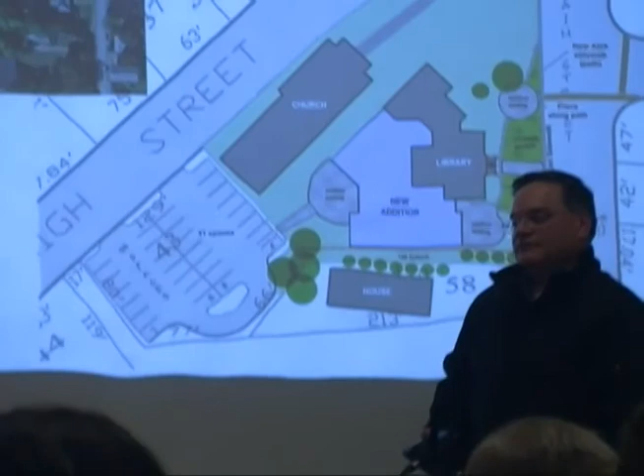If you could relook at the plan a little, and see if you can make that a wider thing, so somebody in the rain can drop off their disabled child, and somebody on a snowy, icy day doesn't have to run their wheelchair over the sidewalk. I don't know why that couldn't be made wider for a car to go in, drop off, and come out.

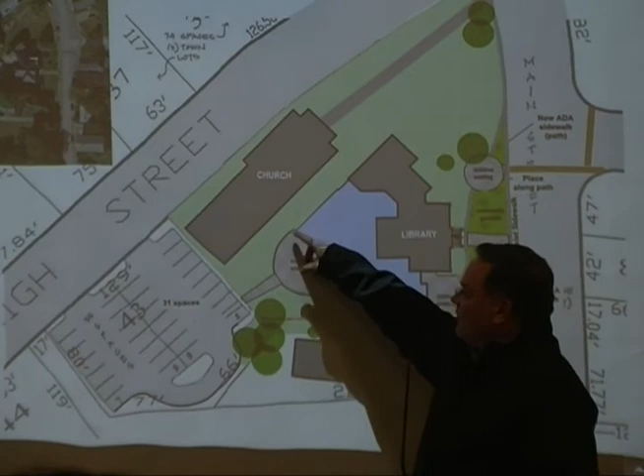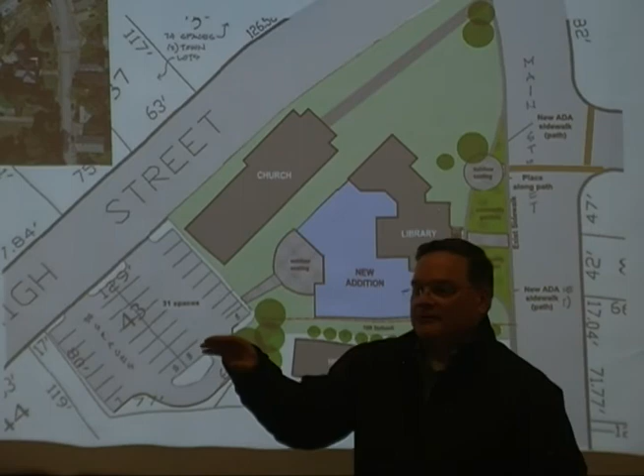So what we're trying to do is create a children's area and a drop-off. So to the points that are being made, this is the opportunity for people to say, you know what I really want? I do want a safe place for the kids to play in the back of the building, but I want to drop off, I want an outdoor book deposit, you know what I mean? I did a drive-through once, lessons learned, don't do it. I won't pick on anyone, but my son's just learning how to drive, so I'll pick on him—not the expert you want pulling up to your new library, throwing the book in the book deposit, okay? You may lose some parts and pieces to the building. But those kind of comments are the things that we want to hear going forward, to make sure we've got everything that's important.

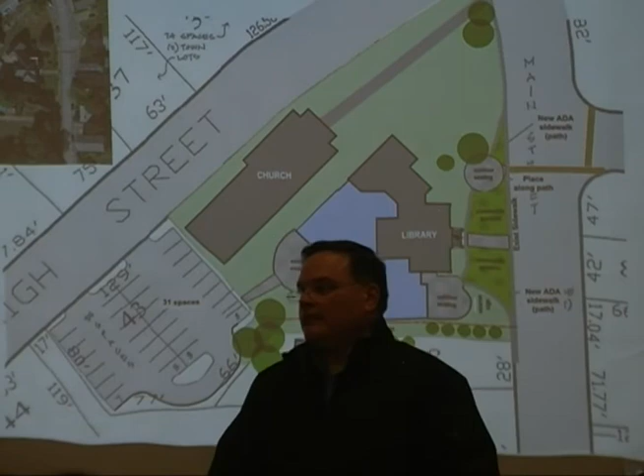Can I address the fundraising question? We have a fundraising committee. Mr. McFarland is the chair of the fundraising committee. He's working—he and I have been up to Plymouth State to look at grants to raise money for the project.

One of the things we want to do is build a model of the library to take with us to fundraisers, because people want to see what the library is going to look like when you go to a big donor. They want to have an idea. So Jim really wanted to have that model. He was involved in raising money for the Archie statue, and some of you may remember he had the little Archie statue to take around. It's very important.

We also want to work with a professional fundraiser to help us figure out that goal and set up a plan. The professional fundraiser will figure out how much money is really out there that we could raise. We're not at that stage yet, but we're really close. If anyone wants to join the committee, Mr. McFarland is sitting in the back of the room and will be happy to take any volunteers.

With regards to the patio space in the back, it's attached to the children's room. So there are a lot of activities on a pretty day where the children's librarian might utilize that space for story time. They may have an owl come from the Squam Lakes Science Center, they read the book about the owl, they talk about blowing bubbles in science, they go out and blow the bubbles. There's a lot of advantage, and there's going to be a direct door between that patio and the children's room, giving a lot of youth programming opportunities to extend to the outside.

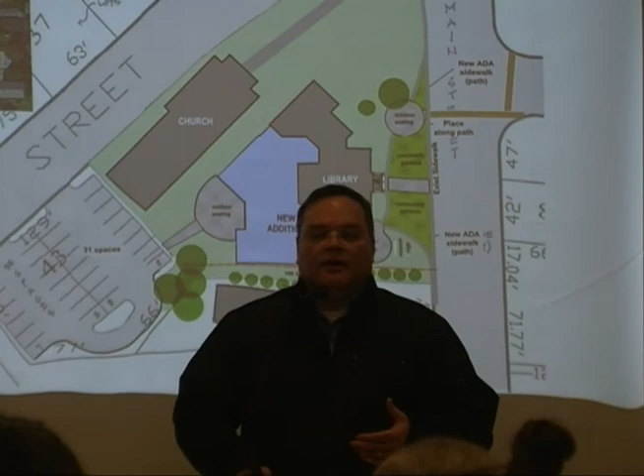I do want to say that we do a lot of public work. When we put this together, we don't just throw numbers around. I'm not saying that anybody else did, I'm just saying that we are very comfortable with the numbers we put together. We've done projects with Milestone - they actually build all the build-outs in our office in Manchester. We know them, they know us, they know the quality of work. I don't know why Milestone priced it differently for Samyn-D'Elia and added more contingencies to those numbers.

No, they didn't. It was Chris Williams for Samyn-D'Elia, different - Canesco, I believe is the name of the company.

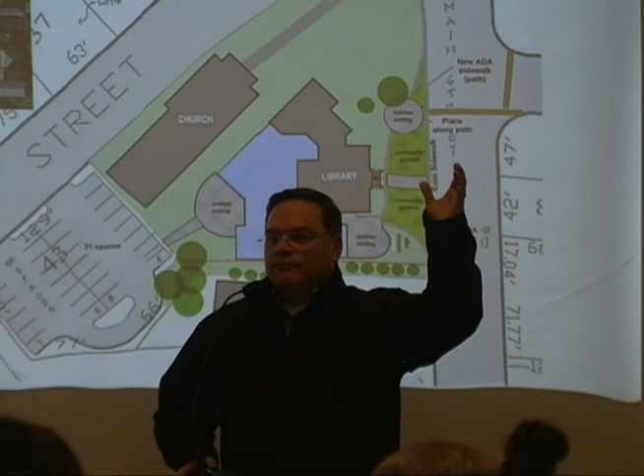So all I can say is, are there any builders in the room? The only reason I'm asking is, for instance, if they don't know enough detail, then I suspect they will put more of a contingency. So their number may be lower, but the contingency is higher because they don't have as much information to go by - that makes their number lower, so they inflate the contingency. I can't speak to how they arrived at a number, but if they're saying that their number is good, then their number's good.

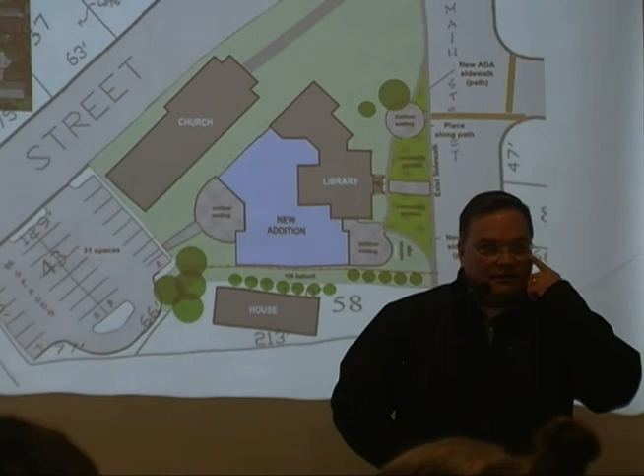I don't want to drag this into the mud, just point out that in many places where the trustees did the financial analysis comparing, if they thought something was in one guy's and not in the others, they added it. In this case, they need to add 275,000 and another 100,000 to yours to get the contingency up to the same level of protection we're getting on the other.

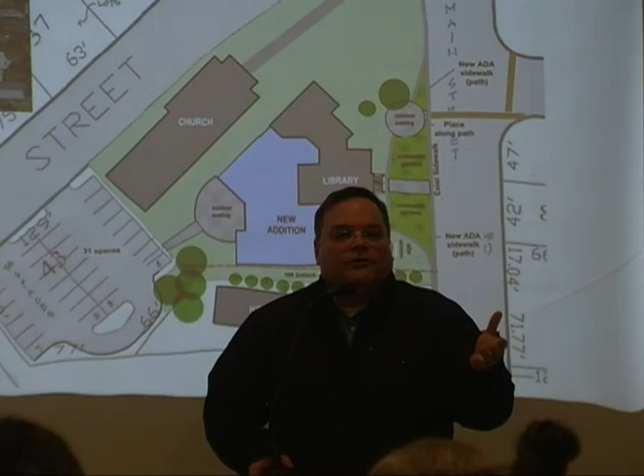But is that the same level of protection? Because if they don't need to protect as much due to the information we gave to Milestone versus what they gave to their contractor, no one knows. You don't know, I don't know - that's why it's called contingency, that's exactly right, what we don't know. And they have more, is my point.

But at any rate, let me move on to the more important issue, I think. Just to be clear, I have no issues or criticisms of your design - I think it's really nice, it's very good, I appreciate it. Thank you, looks good, price is right in the ballpark. It's good, I have no criticism. But I do have issues, and I'll bring this out, with the Samyn-D'Elia quote and design.

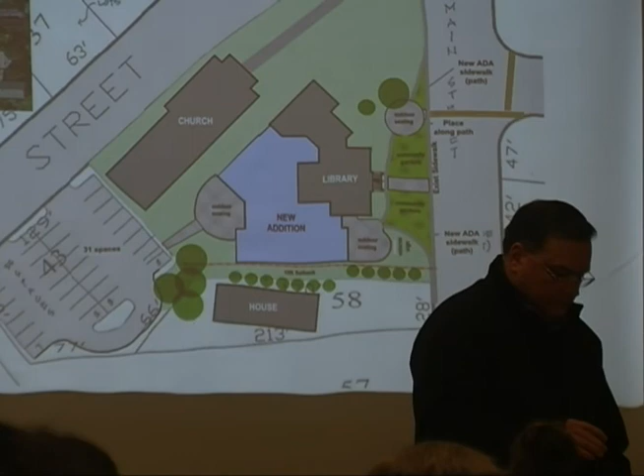And it goes like this. I've heard it said by the trustees on several different occasions that you didn't get to see the design until after the report, and then you weren't really satisfied with it, and that led you to go look for another quote or another architect. It's okay, Ray, I don't want to be rude, but we only have 5 more minutes. All right, I'll go fast. So anyway, the claim was made that you didn't see the design until after we made our presentation, then went ahead.

Well, I'd like to remind you, first of all, that on August 24th, you presented to our committee a document telling us why you preferred, actually, Chris Williams to Samyn-D'Elia. Okay? And so, you guys, 15 points.

I don't know how you do that without seeing the designs, but your very first one is important. Excuse me, Ray, I'd just like to clarify that we saw the 3 architects that the advisory committee interviewed with.

What we did not see was Samyn-D'Elia's detailed design until October 30th, including detailed pricing. It was my understanding from the trustees on that committee that Samyn-D'Elia asked them not to take the design out of that room.

I know about that. I'd say we took it out of the room, certainly, to the select board. We all got the same information. The only thing that wasn't in the one you got in early August was the detailed layout of the inside. You got the gross area, and it was only after working with Erin and her crew that they fleshed out exactly what you wanted inside.